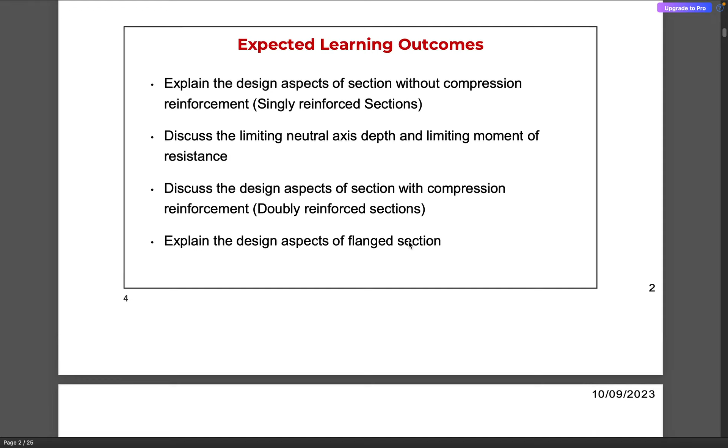As we saw in the last week and the week before, we are going to deal with both the singly reinforced section and the doubly reinforced section, and then look into the aspects of the flanged section also, which is quite useful in the design.

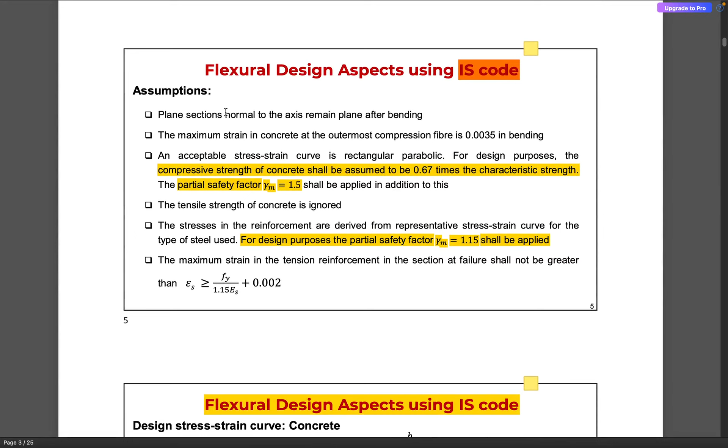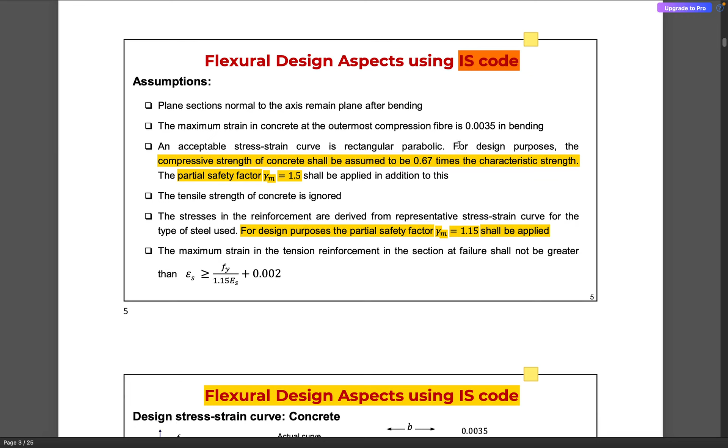Some assumptions we might have already considered in earlier parts of the module, but I would like to reiterate them for completeness. Plane sections normal to the longitudinal axis of the flexural members remain plane after bending, as they were prior to bending. The maximum strain in concrete at the outermost compression fiber is considered to be 0.0035, and the acceptable stress-strain curve is rectangular parabolic, which we will look into at a later stage.

For design purposes, the compressive strength shall be assumed as 0.67 times the characteristic strength, FCK. In addition to this reduction, we apply a partial safety factor: 0.67 divided by 1.5, which turns out to be approximately 0.45 times the characteristic strength. We are going to look at the stress block parameters in detail in the upcoming slides.

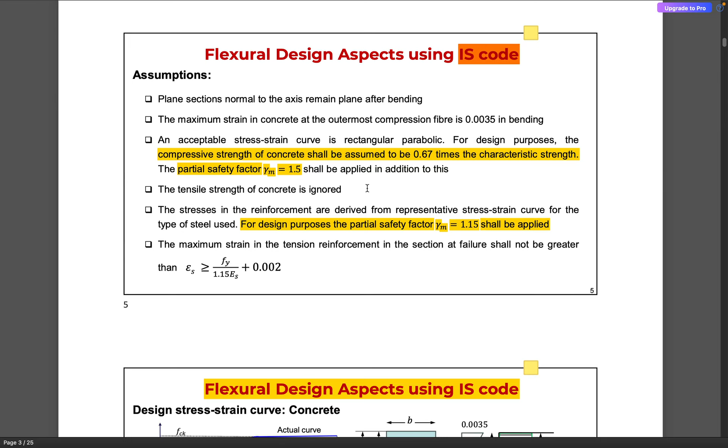Then, the tensile strength of concrete is being ignored.

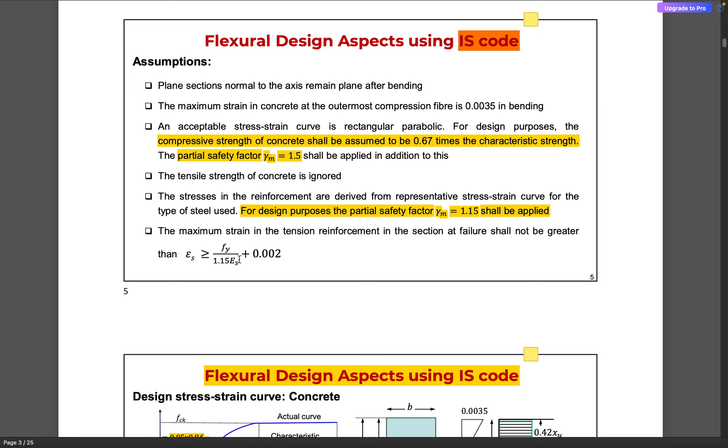This partial safety factor is with respect to concrete, and this partial safety factor of 1.15 is with respect to steel, because while concrete is being cast in site conditions, the reinforcing steel is fabricated in factories in a controlled environment. The maximum strain in tension reinforcement is considered as Fy by 1.15 ES plus 0.002, and this 0.002 is because we consider 0.2% proof strain. We use the offset method to determine the maximum strain, which is why this factor comes along.

And these are the stress block parameters. So when we were considering the material properties, we considered... Excuse me, sir, yes sir, please. Screen is not visible. Oh okay, okay. Thanks, screen is visible now. Now it is visible. Okay, yeah, please interrupt me whenever there is any issue, please let me know.

In the previous parts of the module, we saw that the stress distribution within concrete can be of different shapes. It can be rectangular, but for the purpose of design as per IS code, we consider this partially rectangular and partially parabolic stress distribution. This corresponds to the point of zero strain, and as the strain increases, we can expect the stress along the depth of the cross section to vary in this manner.

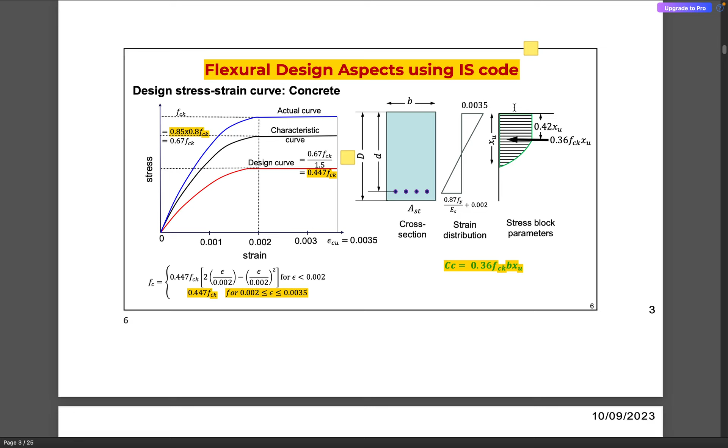For the sake of simplicity, we consider that the average stress is 0.36 FCK, and the resultant acts at a distance of 0.42 XU, where XU is the depth of the neutral axis, and the peak stress at this point is 0.45 times FCK. So this corresponds to the resultant compressive force in the concrete block.

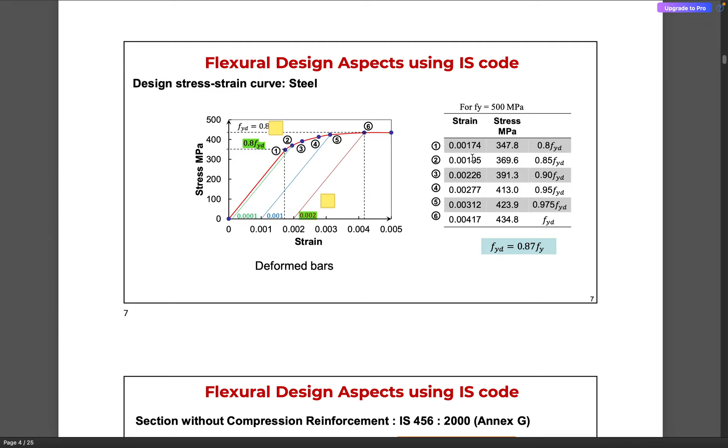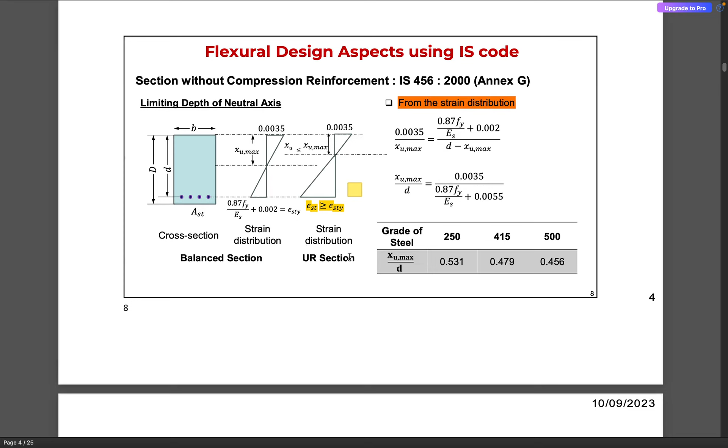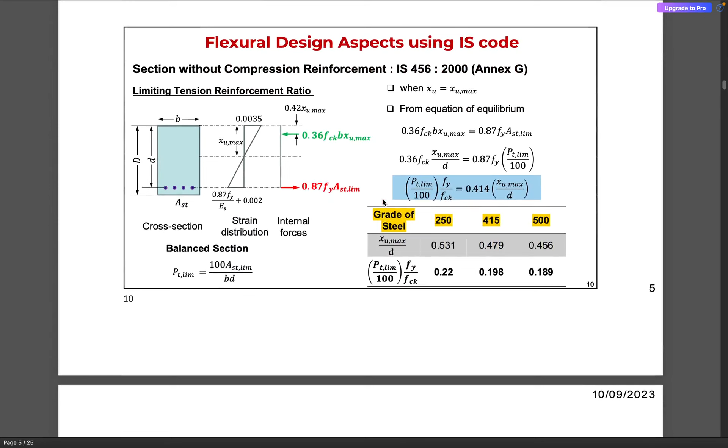And then further we have a limiting percentage of steel reinforcement, which varies corresponding to the grade of steel. So for 250 grade, we have 0.22 as Pt lim over 100 into Fy by FCK. We are going to be dealing with this limiting reinforcing steel area in the upcoming numericals.

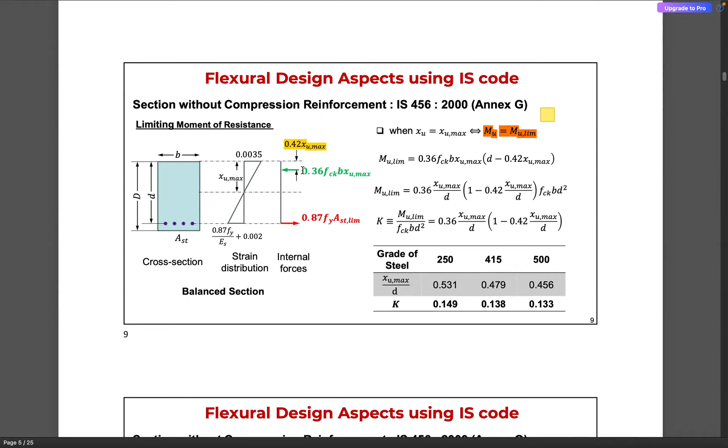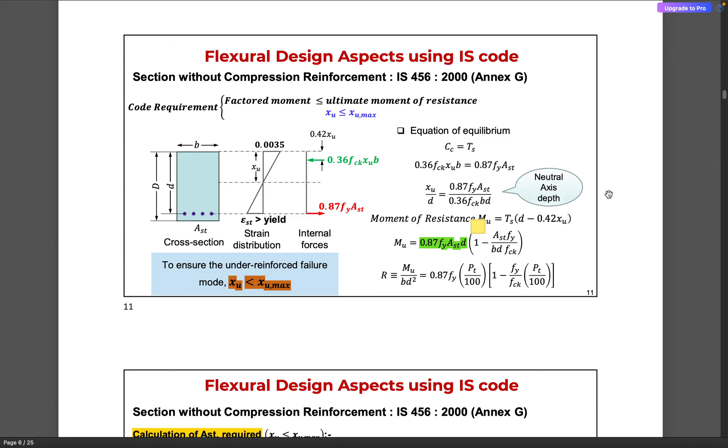This is the moment of resistance considering the tensile force. Earlier, in order to develop the expression for the limiting moment of resistance, we considered the resultant compressive force. In this case, we consider the tensile force within reinforcing steel, which we can also find in Annex G of IS 456. So we can take the help of the annexures in our analysis and design calculations.

We have looked into two methods of determining the area of steel required, whether it is an under-reinforced section, a singly reinforced section, or a doubly reinforced section. So we have looked at essentially two methods.

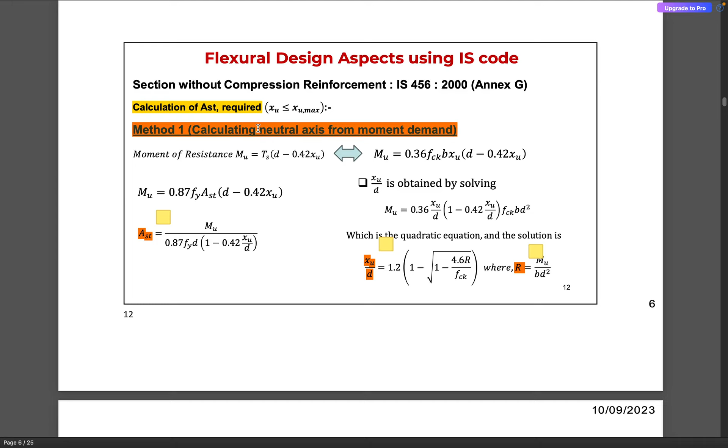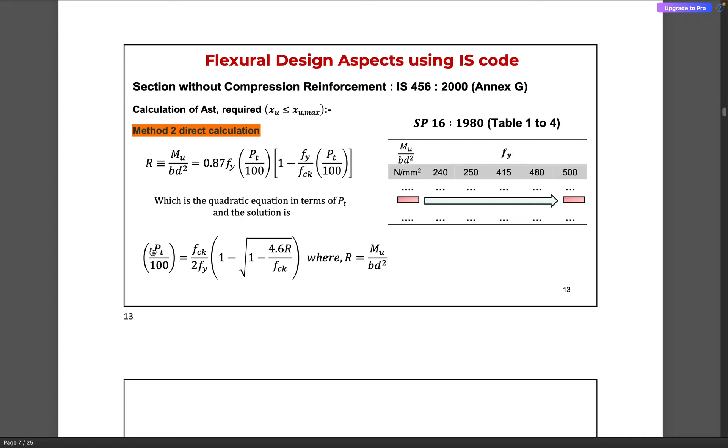Method one involves calculation of the neutral axis and then determining the area of steel from the value of xu by d. The second is a direct calculation where we find the value of r, that is Mu by bd square, and then determine pt, the percentage of reinforcing steel, followed by the area of reinforcing steel.

We then looked into certain examples. I will not go into the details since we will be dealing with the numericals shortly. We also compared the ultimate moment of resistance obtained using IS code values with the actual material properties looked into in previous modules.

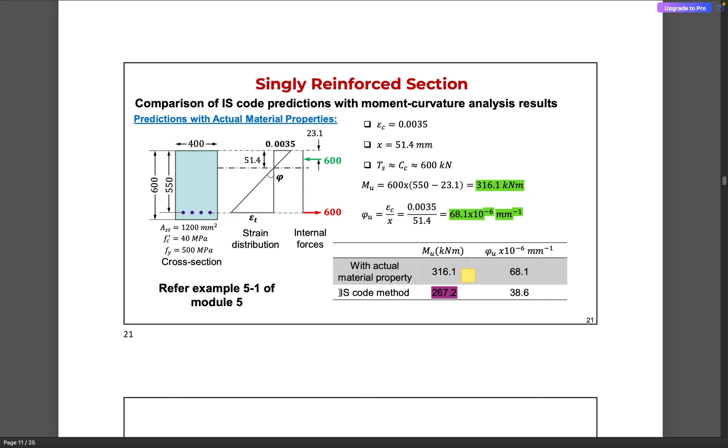When we consider the IS code, we bring in certain partial safety factors, as a result of which the ultimate moment of resistance and curvature will be lesser for the design codes, because they are more conservative. We will look into those aspects as well in today's interaction session.

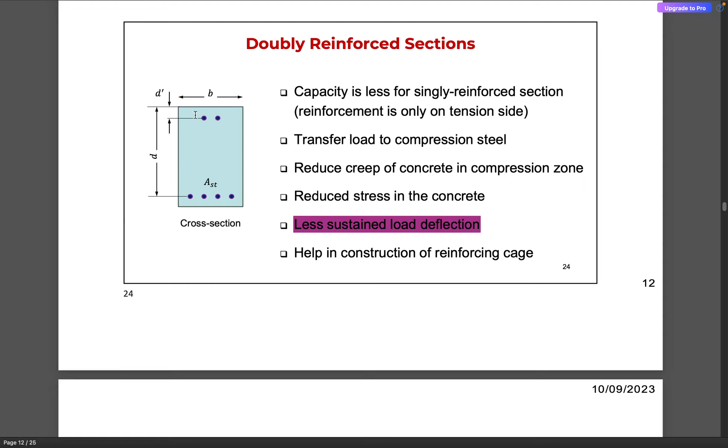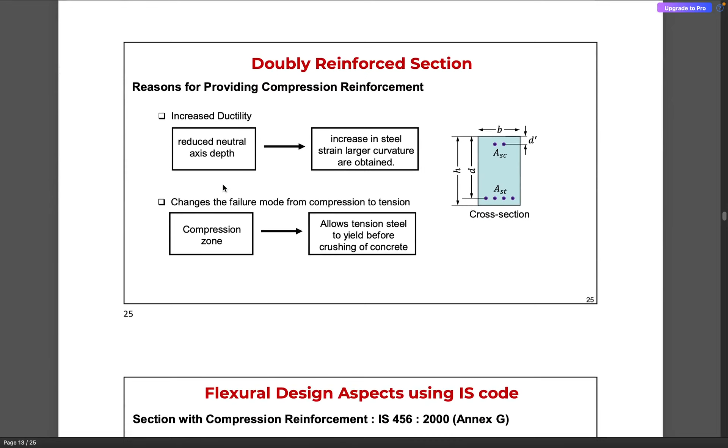We discussed the doubly reinforced cross section, why we need to provide compression steel in addition to the steel in the tension region, and some of the additional benefits such as increased ductility and change in the failure mode to a tension governing failure mode.

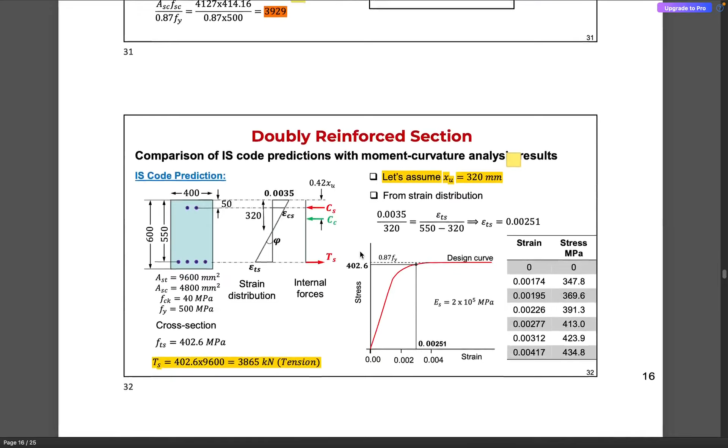We covered how to perform the calculations in order to obtain the area of reinforcing tension steel required, and then we looked into certain numericals, doing analysis to find the moment of resistance and ultimate moment of resistance, comparing with the actual material properties.

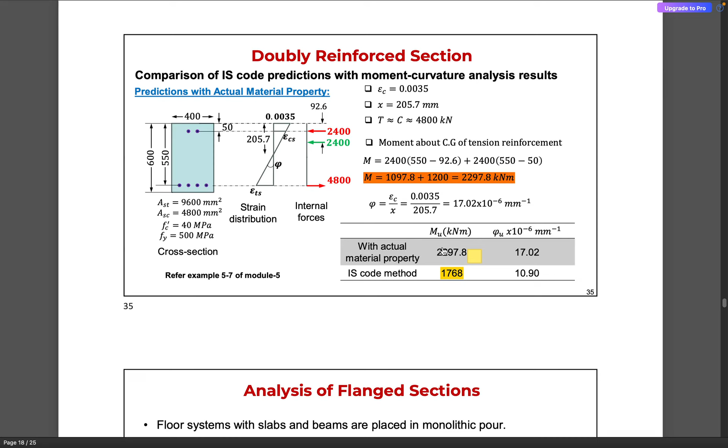Again, we can see that the moment of resistance and the curvature obtained using the IS code is generally a percentage of the values obtained from the actual material properties, because of the partial safety factors.

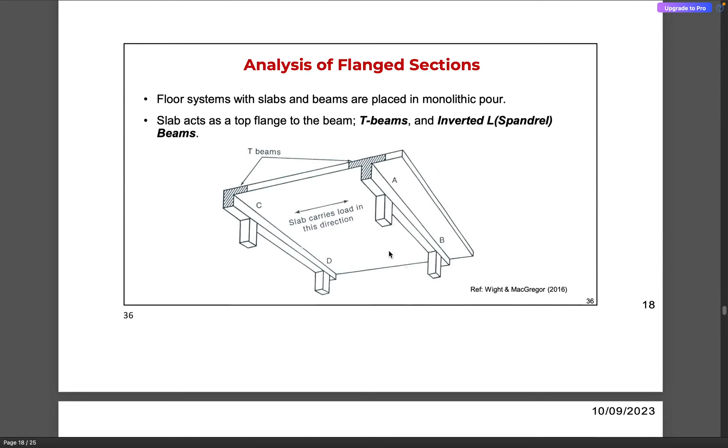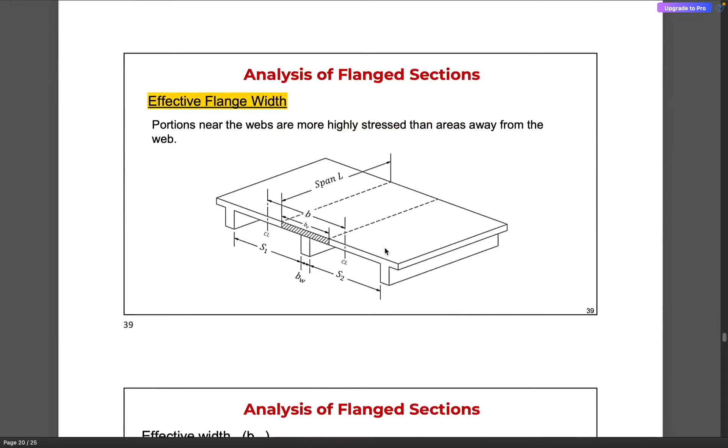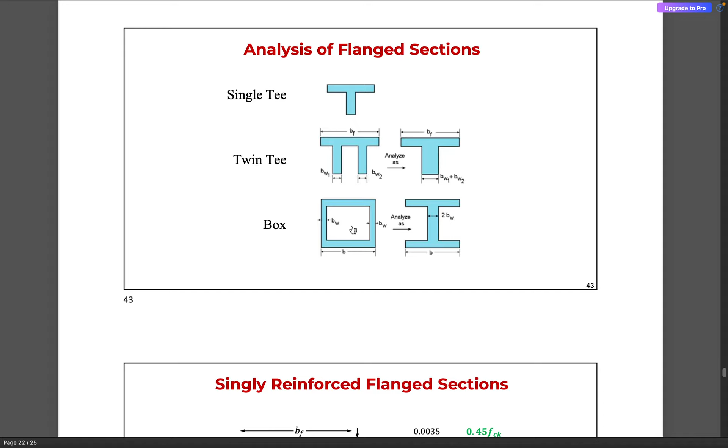Then we looked into the analysis of flanged sections, such as the T beams and the inverted L beam. We dealt with the T section essentially, looking into aspects of effective flange width and how to consider the flange width as per the IS code, and how you can idealize various shapes of beams. The twin T can be idealized into a single T section, and the box section can be idealized as an equivalent I section.

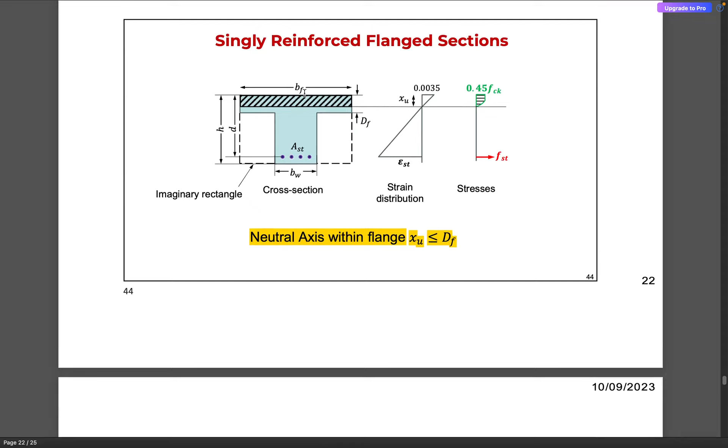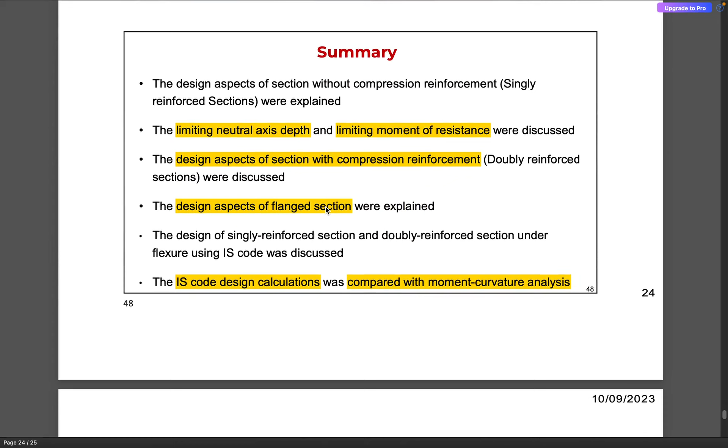Then we covered how the stress analysis is considered for a T section, and how to calculate the ultimate moment of resistance. This was the summary of the module on flexural members, and in the next module we are going to be dealing with shear. On that note, I think we can start with today's question and answers.

Let us start with the question and answers. Question number 1: according to IS 456, in the design for limit state of collapse in flexure, what is the area of the stress block for concrete in compression? Further, what is the depth of the resultant compressive force from the extreme compression fiber? Please take a minute and answer the question.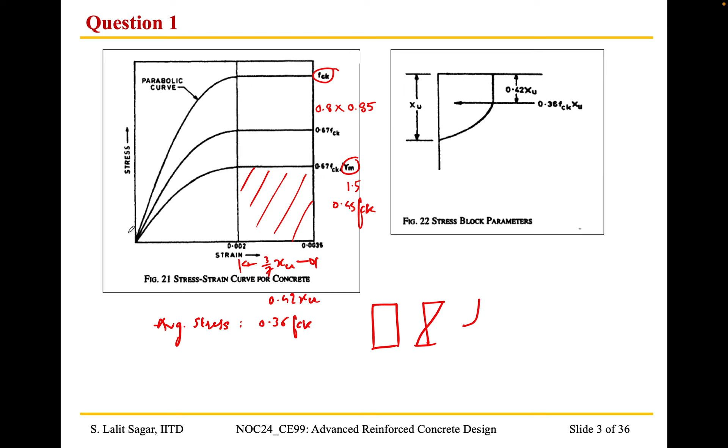So basically, when you consider a beam which is bending about the neutral axis, this is the point corresponding to zero strain. So essentially, this is rotated. What we get here when we rotate it 90 degrees in the anti-clockwise direction, we get this stress block that we are seeing here.

Okay. So as I was mentioning, the average stress would be 0.36 FCK multiplied by the depth of the neutral axis, so this would be XU, right? And this essentially acts at a distance of 3/7 or 0.42 times XU.

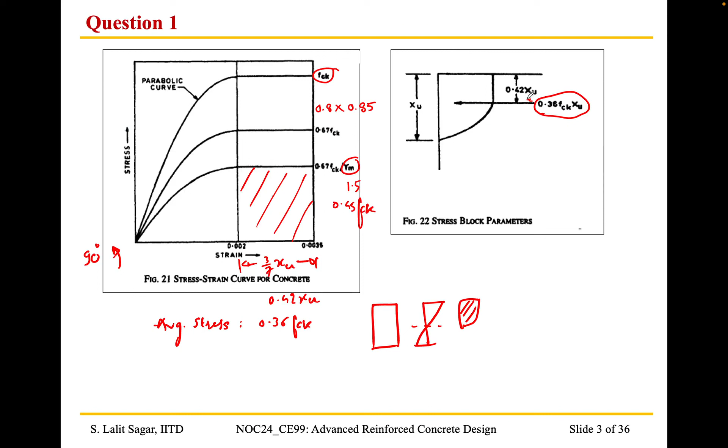Okay, so we'll be using this in the upcoming questions. So option D is the right answer. Moving on, for a reinforced concrete cross section, the ratio of limiting depth of neutral axis to the effective depth depends on which of the following factors?

Answer B, grade of reinforcing steel. Okay, thank you for the response.

Option D is the correct answer, because essentially we are interested in finding out this particular value, the ratio of the limiting depth of neutral axis to the effective depth. So when you consider similar triangles, you have the strain value 0.0035 divided by XU max is equal to the strain in reinforcing steel divided by this value, which is D minus XU max.

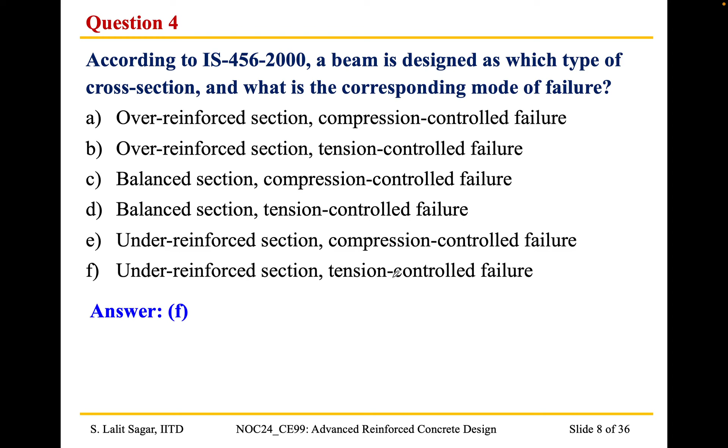Moving on, in the analysis and design of beam for flexure, what does the term R represent? Answer A. Yeah, answer is absolutely right.

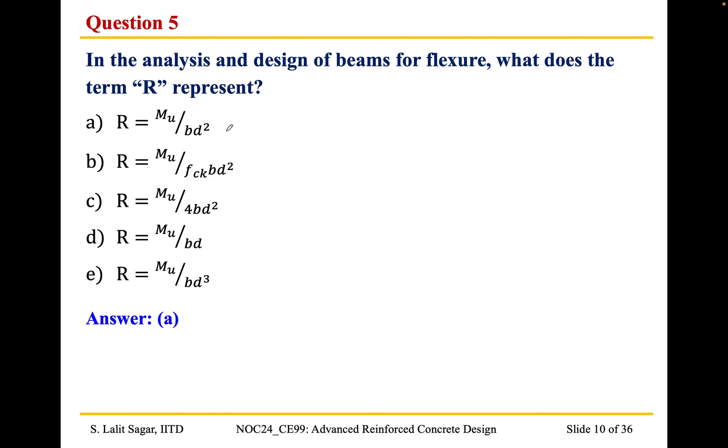So this is not a standard notation, but for the ease of design, and for the design using the SP16 and the design aids, we are going to use this term a lot. So I just wanted to start with the basics. Yes, as we can see, R is given by mu divided by BD square. Okay, this is going to help in the simplification of our calculations.

So moving on, we start with the numericals now. Consider a beam having a width of 250 mm and overall depth of 450 mm. The concrete has a characteristic strength of 30 MPa, and the beam is reinforced with 4 bars of 20 mm diameter, Fy is equal to 500 MPa on the tension side. Assuming moderate environmental condition and 10 mm stirrups as the transverse reinforcement, what is the depth of neutral axis as per IS 456-2000 without considering the limiting depth? Okay, kindly take 1 minute to answer this question.

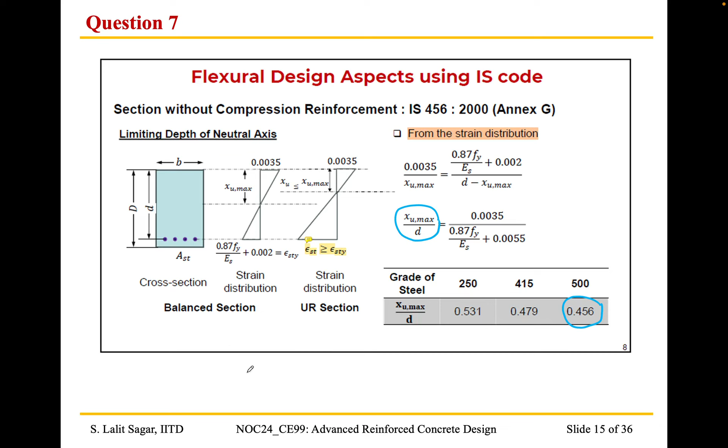So essentially this xu max is equal to 0.456 into 400. So 400 is the value of d, because the overall depth for our question, D is equal to 450 mm,

right? So when you consider the cover, so cover is equal to 30 mm for moderate exposure, and additional 10 mm for the stirrups, and we are considering 4 bars of 20 mm diameter, so 20 divided by 2, so that gives us a value of 50 mm. So the effective depth, that is d, is equal to 400 mm, right? So when you multiply this, we get a value of 182.4 mm.

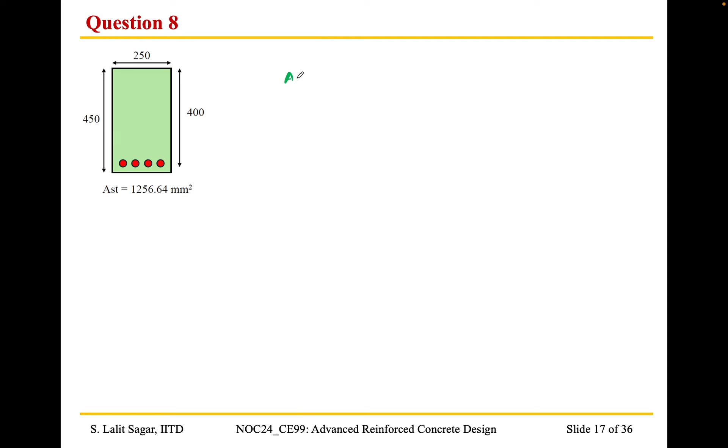So as per annex G of IS 456, what we need here is the ultimate moment of resistance, that is Mu limit. We are determining the ultimate moment of resistance because the xu calculated, that is xu by d, is greater than xu max divided by d, so we need to use this Mu limiting value.

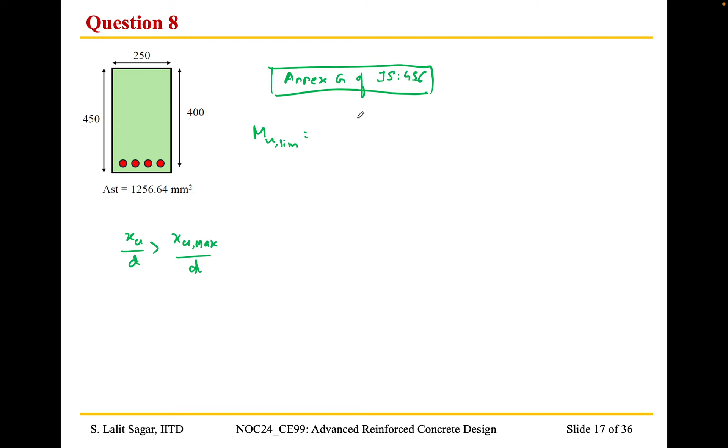But if xu by d is lesser than xu max by d, it means the area of steel is lesser than that for a balanced section, in which case we need to use another expression that we'll see later, that is 0.87 Fy AST D into 1 minus AST Fy by BD FCK. So we need to use that one when xu by d is less than xu max by d.

Okay, so I'm just going to separate this. We use this when xu by d is less than xu max by d. Here in our case xu is greater than xu max by d, so we need to determine the limiting moment of resistance.

That is 0.36 xu max by d into 1 minus 0.42 xu max by d into BD square into FCK.

When we plug the values, simplifying to two decimal places, 0.36 into 0.46 into 1 minus 0.42 into 0.46, into B is 250 and D is 400 square, into FCK is 30, the characteristic strength, we get a value of 160.33 kilonewton meter, that is the ultimate moment of resistance.

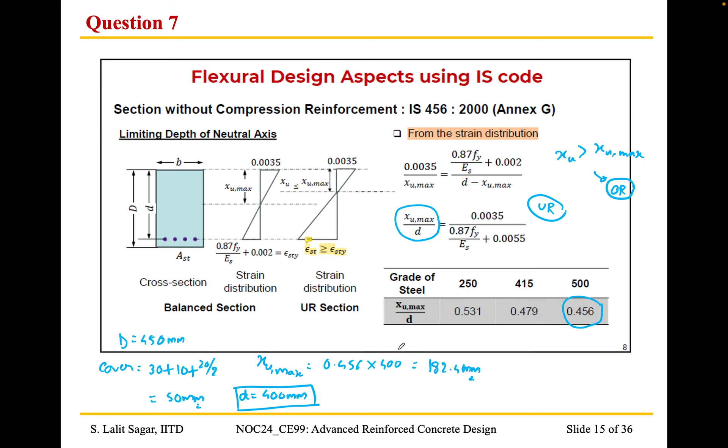And we need to find out the curvature. The ultimate curvature is epsilon c divided by x, so we obtain 0.0035, and the x value, as I mentioned earlier, we need to consider the limiting depth, that is 182.4, for which I got a value of 19.62 into 10 to the power minus 6 per millimeter.

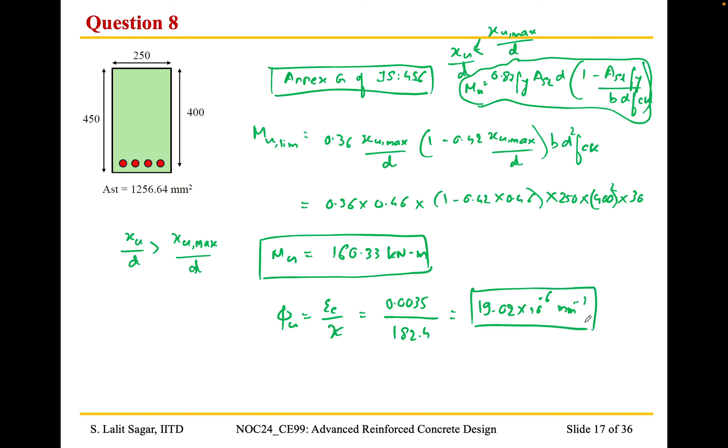Yes, so option D is the right answer. Okay, so we will move on to our next question.

So for the beam given in question 6, what would be the ultimate moment of resistance and curvature considering the actual material properties? In the previous example we looked into stress block parameters corresponding to the IS code, but here we need to consider the rectangular stress block parameters of concrete.

We have solved a similar question I think in the live interaction session 5, so I request you to solve the problem and let me know the answer.

Answer B. I'm sorry, is it B for Bangalore or D for Delhi? Bangalore. Okay, thank you for the response. We will wait another 30 seconds.

Yeah. If the other participants want to answer the question.

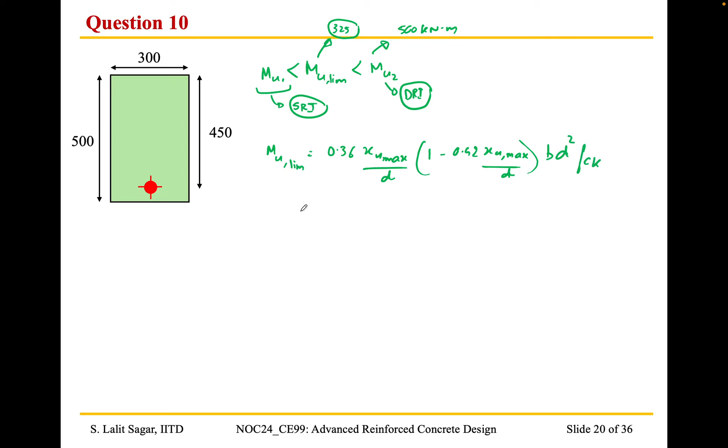So mu limit, as we were seeing earlier, is equal to 0.36 xu max by d into 1 minus 0.42 xu max by d, into bd square into fck. Let me use a different color for better contrast and visibility. We just plug the values: 0.36, and for fy equal to 500, we have 0.46.

So this we need to be very careful about - we need to plug the value depending on the value of fy, into 1 minus 0.42 into 0.46 into b is 300, and effective depth is 450 square into fck is 40.

So we get a value of mu limit equal to how much? It is 324.7 kilonewton meter.

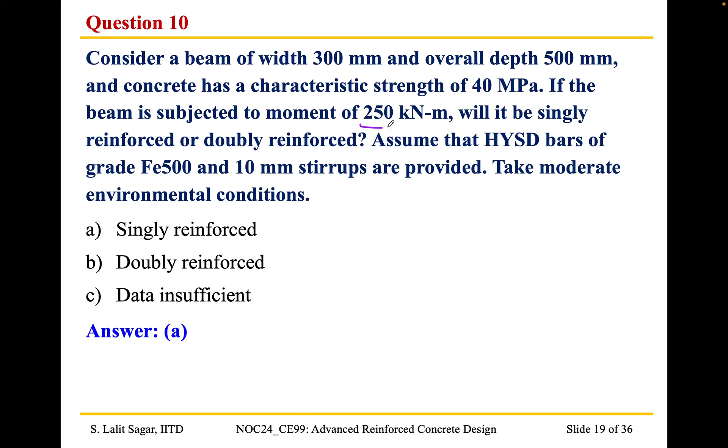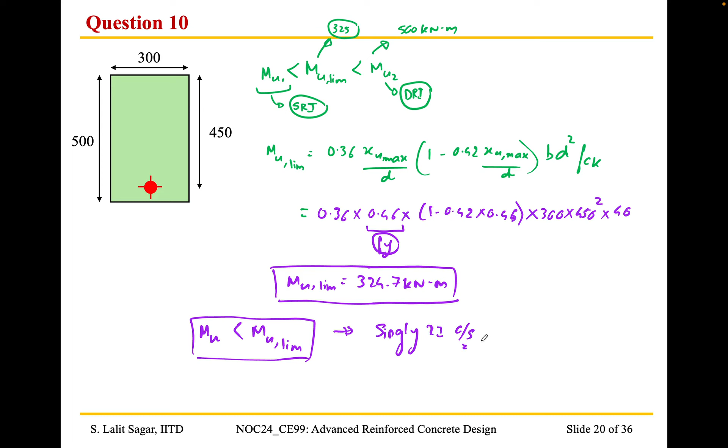So what is our demand? We need to design the beam for a design bending moment of 250 kilonewton meter - this is the design bending moment. So since mu is lesser than mu limit, we can design the beam as a singly reinforced cross section. We are going to be designing in the subsequent parts of the question. So option A is the right answer.

As we have seen in the summary, we have seen two methods to determine the area of steel reinforcement. So in this question, I request you to determine the area of reinforcing steel by method 1, that is by calculating the depth of neutral axis. Kindly take 1 to 2 minutes and suggest the correct answer.

So the geometric properties, that is the breadth, width and depth of the cross section, are the same as question 10.

Answer D. Okay, yeah, thank you for the response. I would suggest to check the calculations once again.

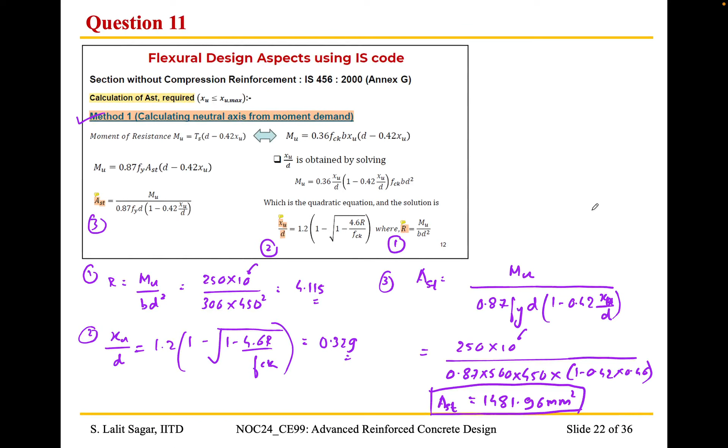If there are no doubts, I think we can proceed to the next question. So for the same beam and for the same moment demand, in the question we need to find out the area of steel required using the direct calculation method. So I request the participants to take 1 minute and come up with the right answer.

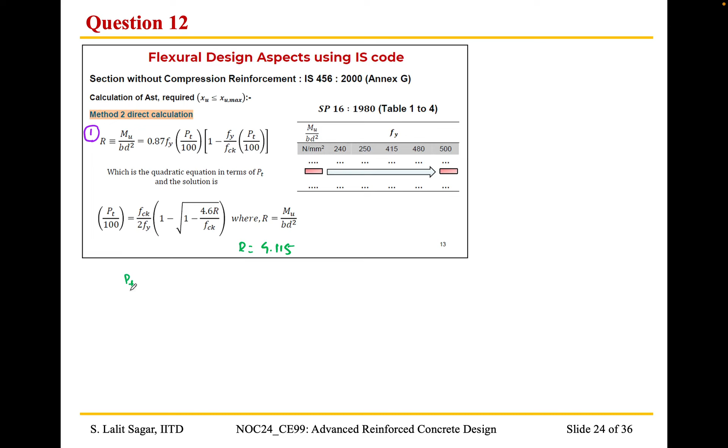That is the percentage of steel reinforcement in tension, PT by 100 is equal to - I'm going to just substitute the values using this equation directly. FCK is 40, by 2 into 500, into 1 minus under root 1 minus 4.6 into 4.115 divided by FCK is 40, which gives us a value of - can anybody help me?

Okay, anybody? 0.0109.

Let me write the answer and you can tell me whether you're getting the same. I got a value of 1.097. Just be careful as to what all terms we are considering within the square root. I request the participants to kindly check, and I'll use a different color now.

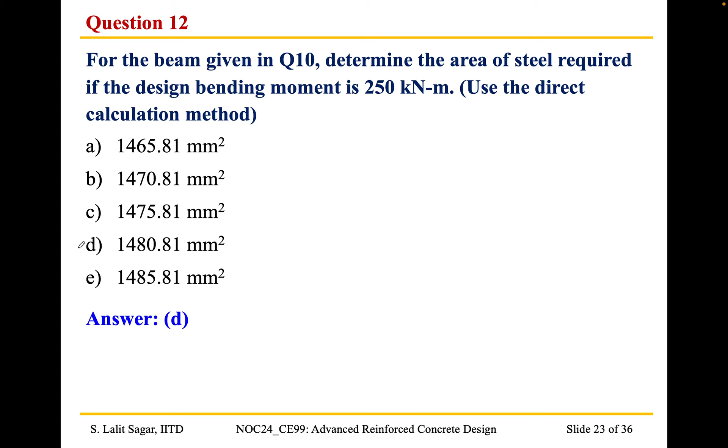Here also we got a value of 1481, and in method 1 it's 1481.96. Here also we are getting almost similar value, 1480. So I request you to just do this, and if you do this you'll be able to very easily solve the assignment questions.

That's the purpose of this. So we are done with the topic of singly reinforced beam. Now we have a conceptual question for the doubly reinforced cross section: which among the following is not a reason for providing compression reinforcement in the flexural members?

Kindly read the options, take 30 seconds, and let me know what is the correct answer. Answer E, thank you for the response. Anybody else would like to participate and confirm the answer, or if you have any other answer?

I think we can go ahead, and option E is the right answer. We've looked into the various reasons why compression steel is preferred. Usually, even if the beam is designed as a singly reinforced beam, we provide nominal reinforcement in the compression region. We provide this nominal reinforcement in the compression zone so that it is able to support the stirrups. These are also called hanger bars. It can be of very nominal diameter, let's say 2 of 12 mm diameter.

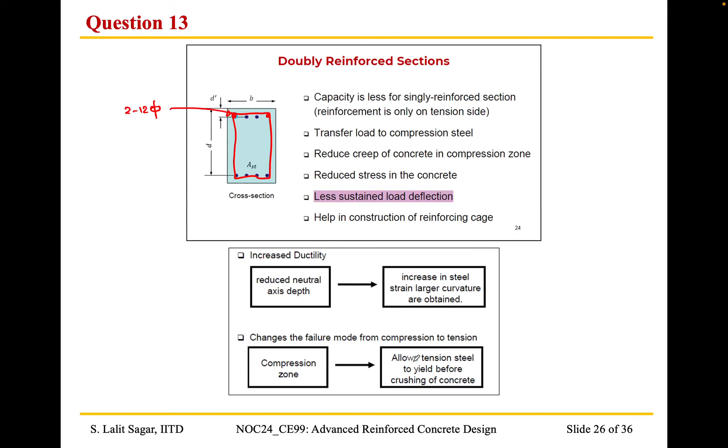So this is the correct statement. Option E is the wrong statement, and hence it is the correct answer. Moving on, so we have the numericals.

We will consider the same beam which we have considered previously, having a width of 300 mm and overall depth of 500 mm, and a characteristic strength of 40 MPa. If the beam is subjected to a moment of 600 kilonewton meter, what is the area of steel required in the compression zone? Kindly take 2 minutes and come up with the answer.

We need to find out the area of steel in the compression zone, that is Asc. Please take 2 minutes, then we can have a look at the correct answer and solution. One minute is remaining for the participants if you want to answer. Or if you want some time, there is no hurry.

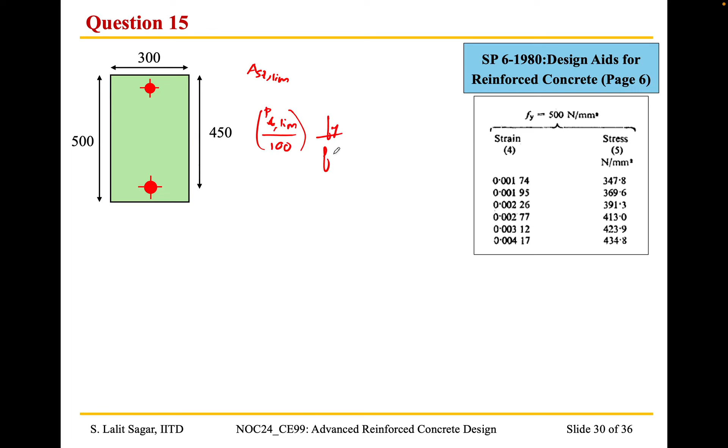Ast,lim is given by Pt,lim by 100 into Fy by Fck is equal to 0.189. This is corresponding to Fy equal to 500 MPa. I hope you remember this particular expression. I can go back to the notes and just highlight it very quickly.

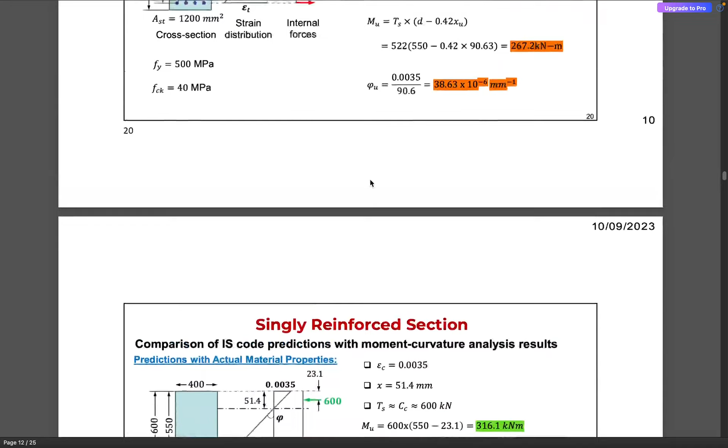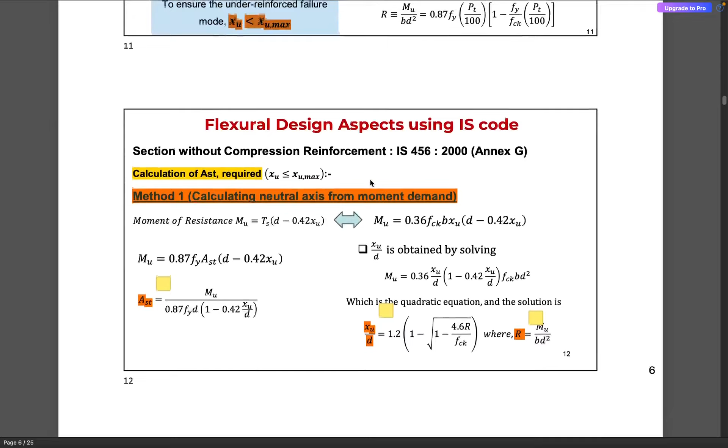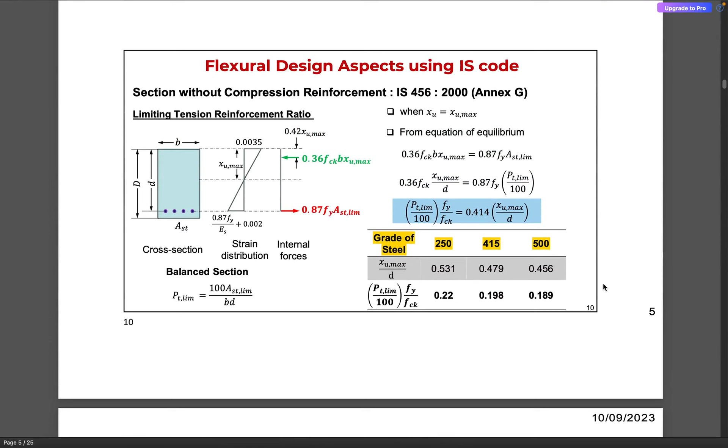So we have the Pt,lim for 500: Pt,lim by 100 into Fy by Fck is equal to 0.189. When we substitute the value of Fy as 500 and Fck as 40, we get the value of Pt,lim as 1.512. Am I right? Yeah, we get a value of 1.512.

So the AST corresponding to this would be: Pt,lim is equal to Ast by bd into 100. So we get AST1 is equal to 2041.2 mm square.

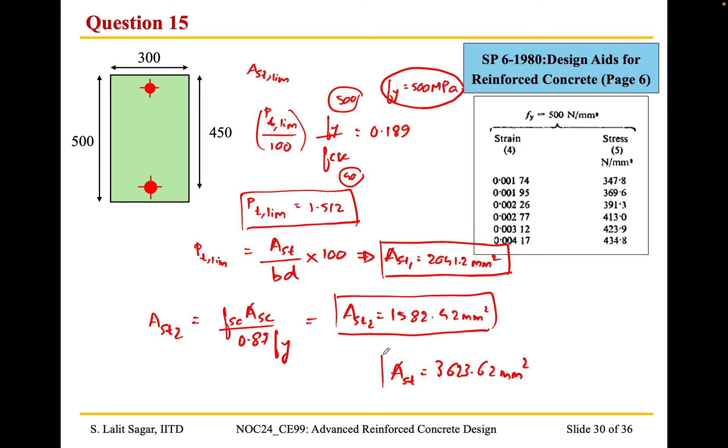And this is corresponding to a limiting moment of resistance. Then we find out AST2 by this equation: fsc into Asc by 0.87 fy. By plugging in the values of fsc and Asc previously obtained, we get AST2 is equal to 1582.42 mm square. AST is nothing but the summation of AST1 and AST2, so we obtain the value of AST as 3623.62 mm square. I request the participants to calculate and check whether they are also getting this value.

So option C is the right answer. I request the participants to solve this problem.

Earlier we looked at the design problem. Now it is an analysis problem. So for an RC beam of the same dimensions, the concrete has the same characteristic strength of 40 MPa. The beam is reinforced with 6% steel and 3% steel of the gross cross-sectional area in the tension zone and compression zone respectively, and it is having an effective cover of 50 mm. What would be the ultimate moment of resistance and curvature as per the IS code? I request the participants to take 1 minute, then we can have a look at the answer.

So the process of arriving at the results from the analysis is a bit more involved and iterative when compared to the design procedure.

So we are looking at the calculations as per the IS code. We have width of the beam as 300 mm, and depth as 500 mm. I have entered the value of AST corresponding to 6% reinforcement, which comes out to be 9000 mm square, and the compression steel is 3%, that is 4500 mm square. D prime, the effective cover for the compression steel, is 50 mm.

Then the characteristic strength is 40 MPa, and Fy is 500 MPa. This is already calculated. Like I was telling earlier, we need to establish equilibrium between the compressive forces and the tensile forces, and for a value of x equal to 298.3 mm, we obtain Cc plus Cs equal to 3167 and 3167.

So for those following carefully, the value of x is greater than the limiting depth of the neutral axis, that is, greater than 0.46 times the effective depth. But this limiting depth is valid only for the singly reinforced, balanced section. For a doubly reinforced section, for the purpose of analysis, we can consider a value of neutral axis depth greater than 0.46 times the effective depth.

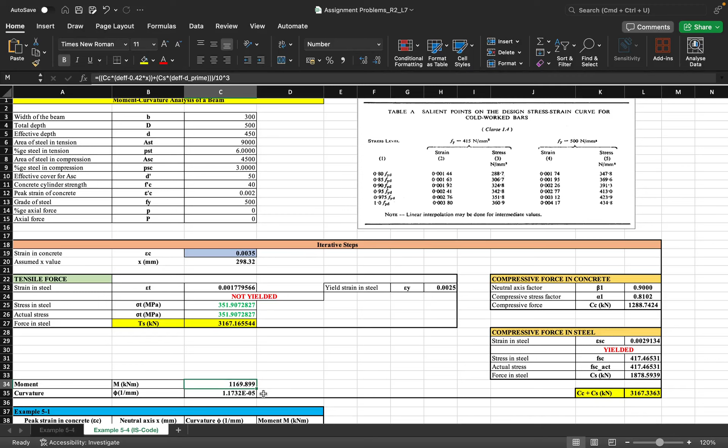So after this we find the moment of resistance by multiplying the compressive or tensile force with the lever arm. We get a value of 1169.9 kilonewton, and the curvature is 11.7 into 10 to the power minus 6. So option A is the right answer.

So if you have any question, we can solve it using hand calculation in the next class. And we have the last question for the day: what would be the ultimate moment of resistance and curvature considering the actual material properties? If you allow me, I'll go straight to the solution, since we have already overshot the time limit.

Okay sir, yeah. So we will go to the spreadsheet once again. So yes, this was as per the IS code, and this would be considering the actual material properties. We have B equal to 300, D equal to 500, and this would be 450, and AST would be 9000, and ASC would be 4500. D prime, F prime C.

Yes, so for an x value of 257.15, let's see what happens. Okay, I think this is the wrong sheet. Let me go here. Let me check it once again.

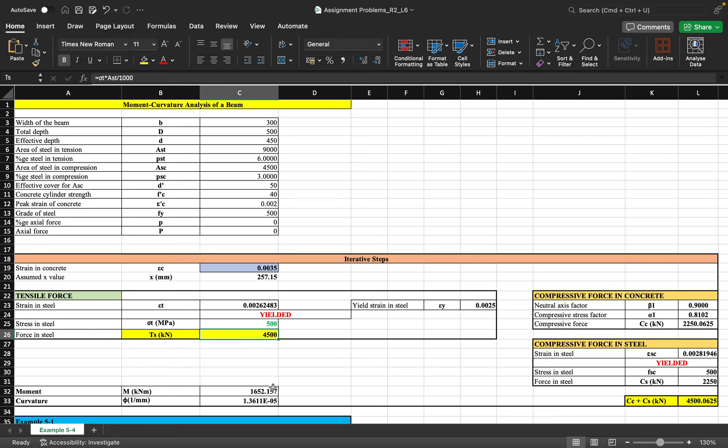Yes sir, yeah, so this was the issue. So after plugging the value of f prime c as 40 MPa for x value of 257.15, I was able to achieve equilibrium between the tensile forces and the compressive forces, and the corresponding value of m and phi would be 1652 and 13.6. Okay, so the correct answer is option D, right?